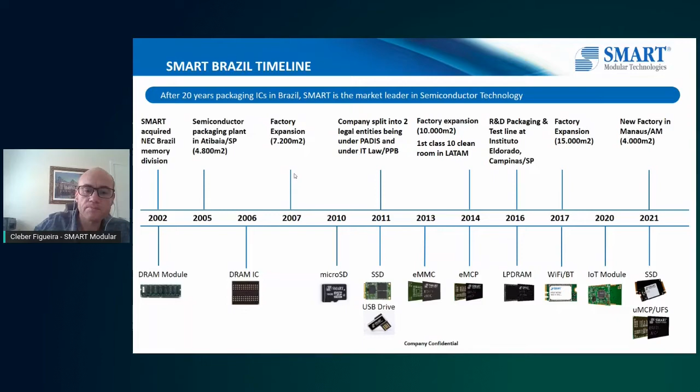So here, just to give you an overview about the Smart Brazil factories: we have the semiconductor company located in Atibaia, with capacity around 150 million dies per year. This is our actual capacity that we can assemble. We have around 15,000 square meters, and of this 15,000, 5,000 is a clean room. Our major activity is packaging devices, integrated circuits in several areas that have DRAM, Flash IC, SSDs, and others.

For our memory companies, we have two structures, one in Atibaia and another in Manaus, and also an R&D center inside the Eldorado Institution in Campinas. Our internal production capability - all the machines we have - uses M2M communication, all based on Industry 4.0. We also have a full automation system, with more than 316 robots in the structure that help make our production easier, and a specific MES system that helps our production team and engineering team manage all necessary activities in our production line.

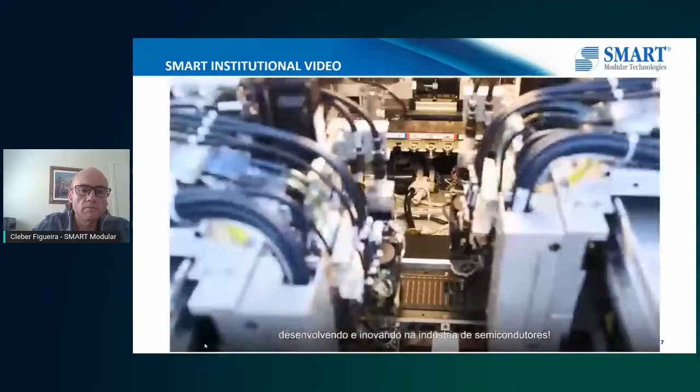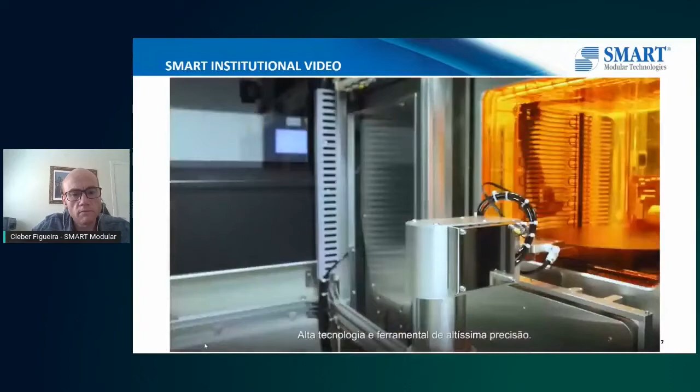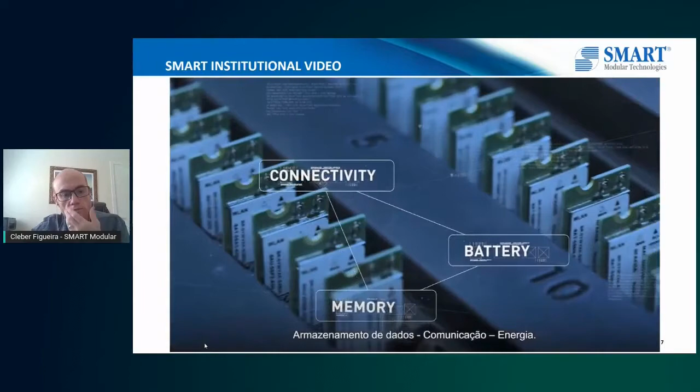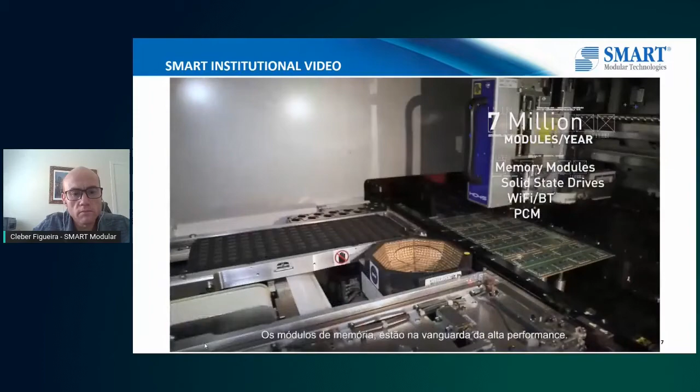Each new day, technology is more and more present in people's lives. Everyone is more and more connected. Technology does not stop evolving, advancing. SMART Modular Technologies is at the very heart of all this evolution, developing and innovating in the semiconductor industry. With a large and modern production center, advanced equipment, high-tech, high-precision tooling, machine-to-machine communication, robots, training and advanced manufacturing, prepared for the fourth industrial revolution - Industry 4.0. SMART delivers products that form a tripod: processing and storage, communication, energy. More than 15 years producing semiconductor components for the world's largest manufacturers and dominating chip packaging technology in Brazil. Memory modules at the forefront of high performance. Lithium-ion polymer batteries provide power to the most renowned devices in the mobile communications market.

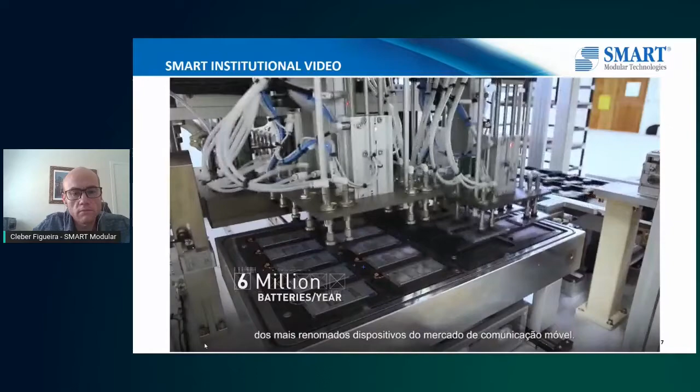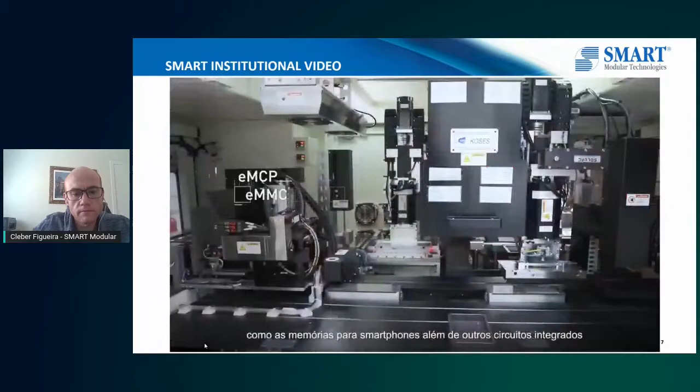Approximately 670 million reais were invested in the development, design, and implementation of semiconductor components, such as memories for smartphones and other high-tech memory integrated circuits. An additional investment that can reach 700 million reais by 2021 is already planned.

SMART is a global company and is proud to have chosen Brazil to be its technology center for semiconductor components packaging, strategically located in the city of Atibaia, state of São Paulo. SMART also has a research and development center dedicated to its operations in Campinas, producing products with high standards and excellence.

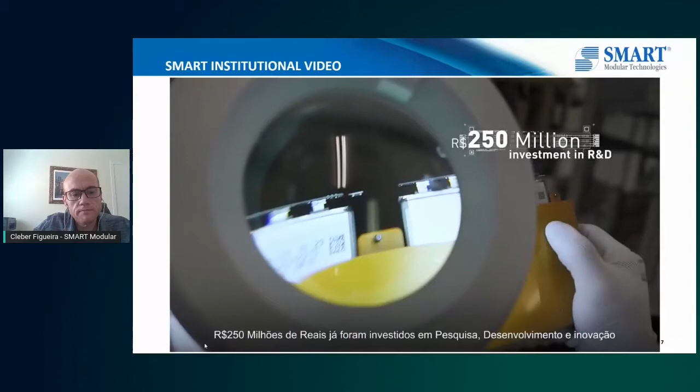250 million reais have already been invested in research, development, and innovation of products and manufacturing processes. An example of this is the unprecedented investment in the creation of a semiconductor prototyping line within the Eldorado Research Institute in Campinas, state of São Paulo.

The worldwide technological evolution does not stop. The priorities for the Internet of Things are already defined in Brazil. SMART is part of the National Internet of Things plan, developing innovations to keep at the forefront of all this evolution.

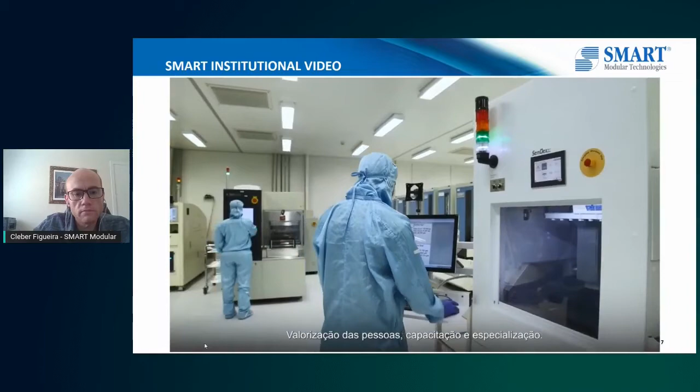People recognition, training, and specialization. Professionals with the highest levels of academic background. The challenge of further driving and developing semiconductor technology is the challenge of creating the future. SMART works unceasingly to be at the front line of this future.

Think memory. Think SMART. SMART Modular Technologies, developing technology and projecting the future in Brazil.

So this is the video that I'd like to share with you. This is important to give you a better understanding of what kind of capability we have inside of SMART and what we can do in our production.

So moving ahead with our presentation. Here I'm showing the main activities that we have considering the R&D team that we have in Brazil and Korea. As I already said, we have a very close relationship with a development team in Korea. We have more than 30 engineers located in Korea to support our activities in Brazil.

Basically, we are focused on developing new business, looking for the market necessity, designing new products. We also have a very close relationship with some universities in Korea, where we can send our engineers to join some trainings, to learn new technologies and new products, and once they are prepared, they come back to Brazil and help us develop the products that are important for us.

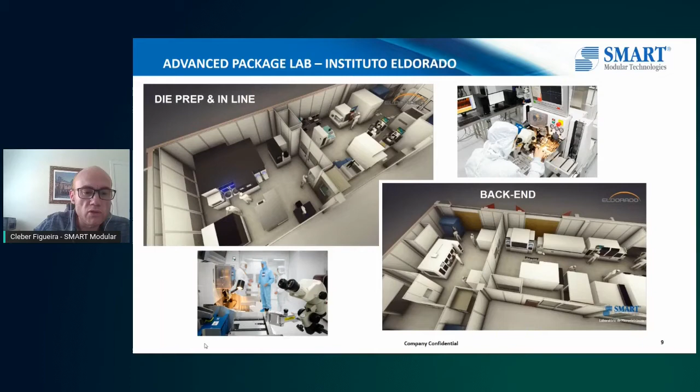Talking about some of the technical capabilities that we have, nowadays we are able to develop some products designed in Brazil. Some system in package - we just concluded one product that we developed recently. It's a system in package based on LoRaWAN technology. I will talk a little bit more about this development later on in this presentation.

Also, we are able to develop some integrated circuit packaging processes. We are able to develop a new process assembly inside of Eldorado. So we can also validate some multi-chip packages once we are talking about the new technology. We are able to do some memory module designs in Brazil. We can support this kind of activity.

And also, we are able - now we are working on IoT product design. We already developed some modules, some evaluation boards, and some application boards that are supporting the market necessity and some customers that we have nowadays inside of Brazil.

Also, we are able to test and validate some new technology. At this moment, we are studying and evaluating two new technologies that we imagine are very important for us, looking toward 5G technology. One of them is the laser trench. The laser trench is a process that we need.

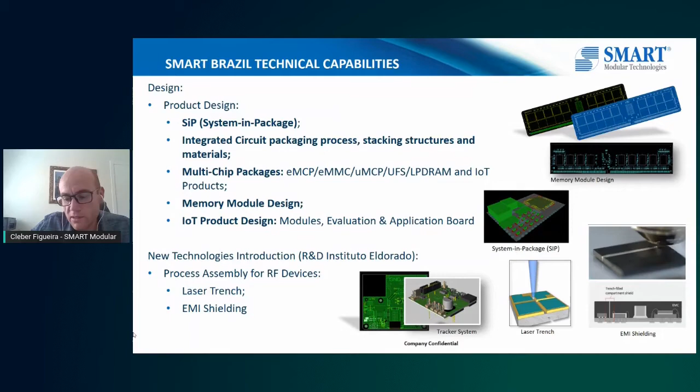Once we are talking about the technical manufacturing process, we are able to do several activities. We are able to prepare wafers up to 30 micrometer thickness, very thin wafers that we use in our encapsulation and package process. We also have stealth dicing before grinding, a new technology to prepare wafers for the inline process.

We already developed some products that are able to have die attach up to 16 die stack. So we have a picture here, let me use the laser pointer. This is a product that we developed inside of Eldorado, where we have 16 die stacks, and we transferred this technology to our manufacturing process.

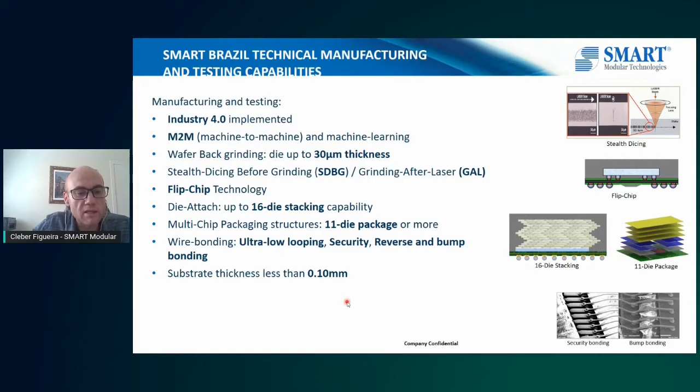The most complex device that we have nowadays has 11 die stacking inside of the same package, and the thickness of this package is around 1 millimeter. So you can imagine how complex and what kind of challenge we have to assemble this product in our production line. Also, to give one idea, the substrate thickness we use nowadays in our product is less than 0.1 millimeters.

We have a very, very close relationship with Samsung. Samsung is our strategic technological partnership. They are responsible to support us with the wafer level, so all the wafers that we use in our production came from Samsung, from Korea.

We just implemented this, and our first sustainable report was launched last month. We can find this report on the internet. We can find this report from SMART, where SMART Brazil is located inside of the SMART Global Holdings report.

Also, I'd like to call your attention to the AEO certification that we already have. And as SMART is NASDAQ listed, we need to follow SOX compliance, and we undergo annual compliance audits to be in accordance with the governance, regulation, and compliance necessary for NASDAQ regulation.

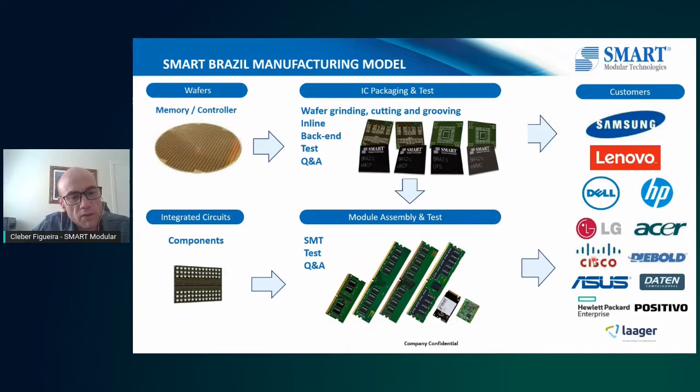Our main customers are Samsung, Lenovo, Dell, HP, and others. Part of the IC that we assemble becomes our IC package. Part of them is transferred to our module assembly line inside the other company. So the IC package is our raw material to assemble the modules and other devices, especially memory modules and SSD. Once we conclude the assembly process, these products are provided to customers the same as the IC package.

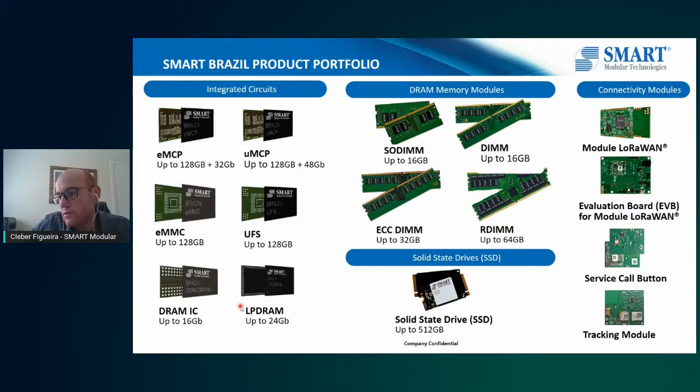So let's start to talk about the IoT development activities that we are doing inside of SMART Brazil nowadays. We started the activities for IoT around 3 or 4 years ago. At that first moment, we decided to take a look at the IoT wireless connectivity technology that we have on the market. So we started a study about the value chain and tried to see what the main technologies are for this kind of product in Brazil.

Based on several research studies that we did with some partners and potential customers, we identified that the most relevant and important activities to focus on are long range technology and especially low power. So then we started to study what kind of technology we have inside of this group, and we identified LoRaWAN technology, Sigfox, and also LTE, CAT-M, and CAT narrowband activities.

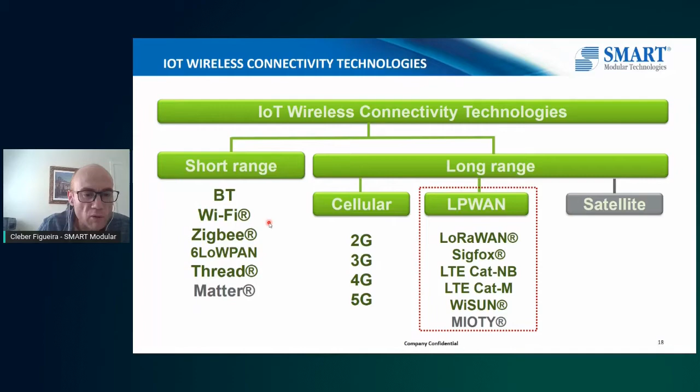Once we had this definition, we prepared our strategic plan inside of SMART to start our internal development. As the second part, once we identified the technology, we started to study the market necessity, and we identified what the potential device could be, considering the technology we imagined would be interesting to support our internal activities.

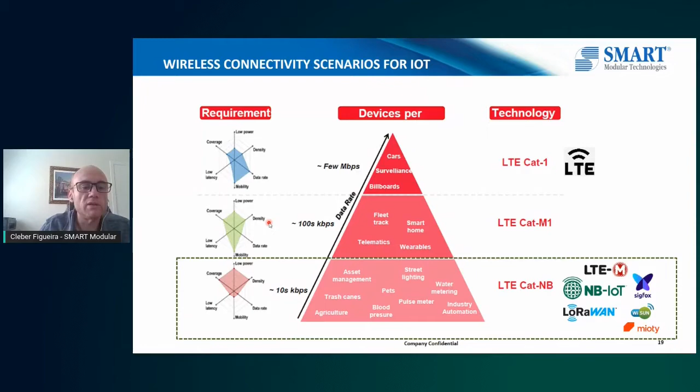So then we decided to work especially on the base. We started to work using devices to support especially asset management, street lighting, and water metering. So then we started to work internally to develop products to support this internal necessity.

Here are the main application segments we defined inside our strategic plan. At this moment, we are putting focus especially on the metering segment and also on the tracking segment. All the products we are developing now, and also the products we already developed, are to support the activities in these segments.

So we are putting focus on power, water, and gas, and also on asset tracking. Based on these definitions, we started to develop our products in the Brazilian team. So the first product we launched is the LoRa Primo, this device. It was launched in May 2020.

In sequence, we started to work on other different products with the same footprint and the same technology. What is the advantage? Why did we define the same footprint? This is one advantage, especially for the final customers, because once they develop a product using our module, it's possible to change the technology very quickly without needing to change anything in their design. So the main idea is to give flexibility for the customer to use different technology in the same PCB design or product design.

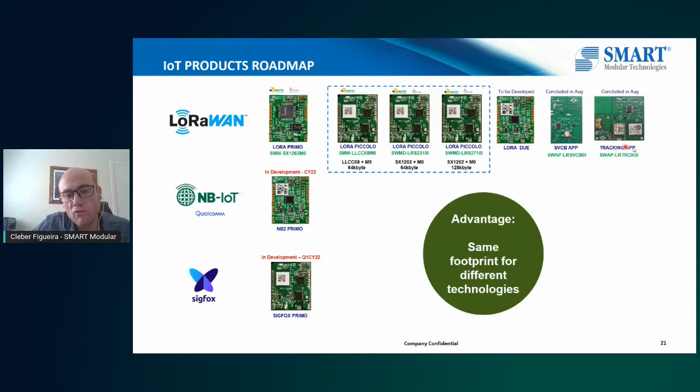So this is our first module, which we launched in May 2020. We already have around 60,000 devices in the market under usage in different applications, and up to now we haven't received any return from the field.

One important thing about our module: 100% of the devices we manufacture in our company in Atibaia are 100% tested in the production line. So we have high confidence that the product has the right quality to support activities in the market.

Additionally, it's important to say our module is able to work with up to 20 dBm RF power transmission, and we have 6 GPIO communication on this device.

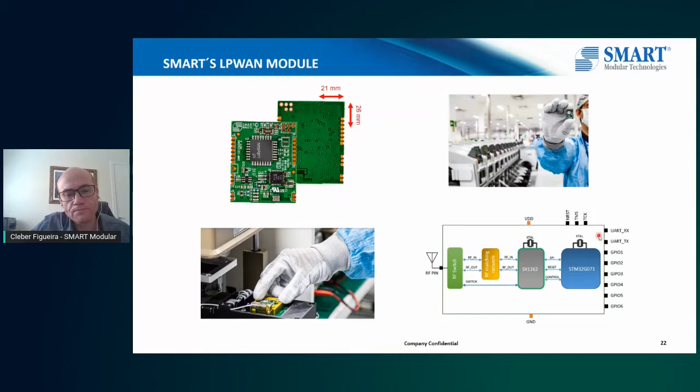To support our customers' activities, we decided to develop an evaluation board. This is a board we can provide to anybody who wants to test and validate our product. If you want this board, just get in contact with our new business development, and I can give you the details later. You can request this board to test, validate, and see how our product is working nowadays.

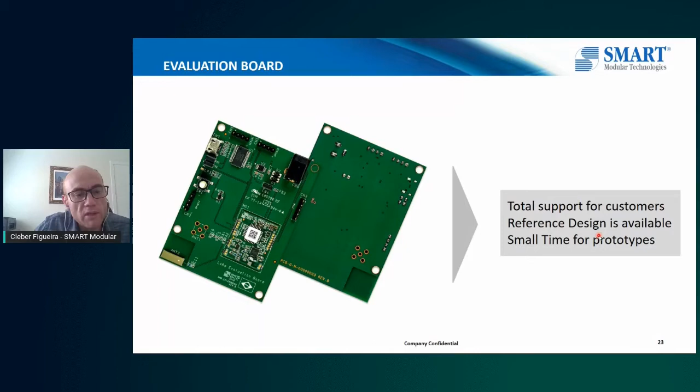We also have a very good technical team inside SMART that can give you total support to develop your product. We can also provide some reference designs that we have available. The main idea here is to reduce the time needed to prepare your prototypes.

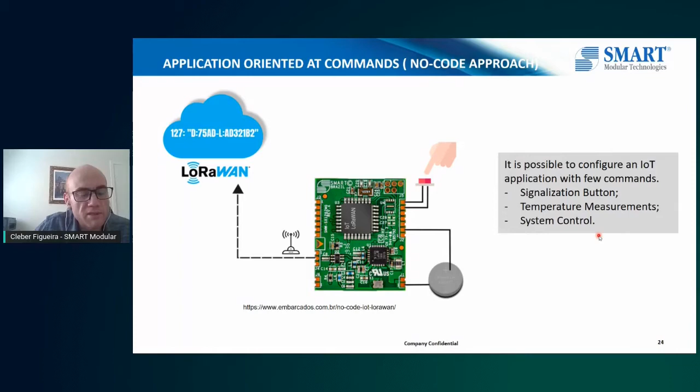This is another item we are working on with our local team: we implemented application-oriented AT commands. What does that mean? We developed commands inside our firmware, placed inside the device, that give you the possibility to implement small applications very quickly, so you don't need to develop the firmware from the beginning. You can provide AT commands to the device and configure it to work as you want. For example, we have firmware already prepared for a signalization button, temperature measurement, and also system control.

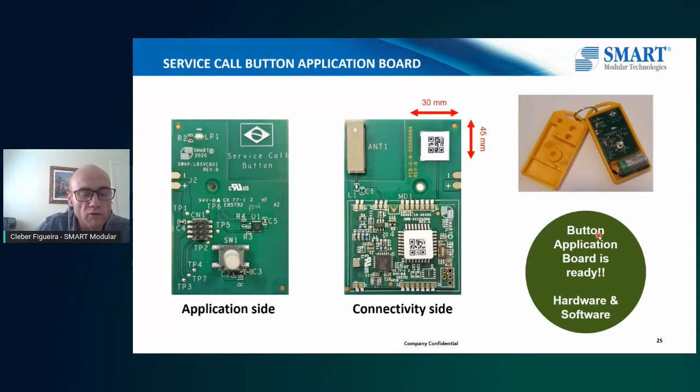Here's just one overview of one of the application boards we have. It's a very small device, like an emergency call button, with an accelerometer inside. If you fall, it can send a message to the servers, or you can configure a mobile device to receive the message. So it can give you support and call your attention based on the emergency situation. This board is already developed, and we are able to support it with prototypes and samples, to validate and see how the device is working.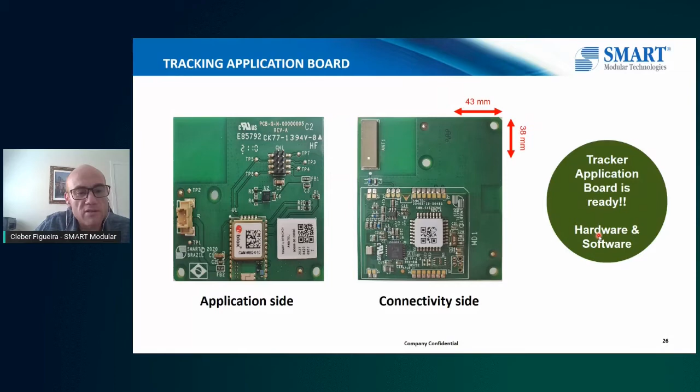So here also is a track device. We developed this one very small, so we can put this device inside a cigarette package. It is smaller than a cigarette package, so we can use this device in different applications. We can use it as a tracker, as an emergency device, or to monitor items like children, and other applications as well.

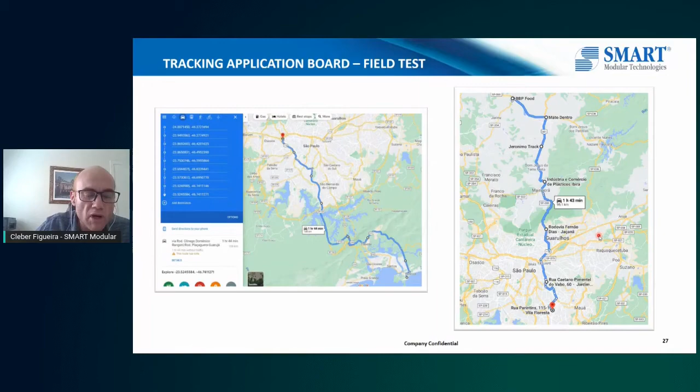So I'm going toward the end of the presentation, but I'd like to give you some idea about the new product that SMART is working on. It's a local development that we are doing in Brazil. Our team started to work on a system-in-package design, 100% of the device made by the team in Brazil. The idea is to reduce and put all the functionality from a LoRa device into one integrated circuit.

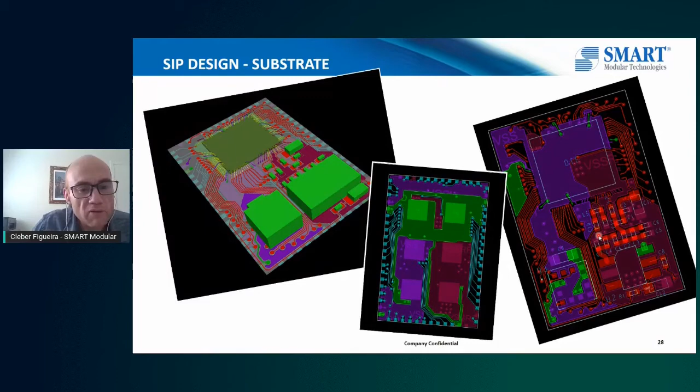As the next steps, we are starting to do some internal qualification. We are trying to use the device in different applications to see its behavior once we start working with it. Additionally, we are working to develop some evaluation boards. The main idea we have in mind is to provide this device for tests using some customers that we have in our portfolio.

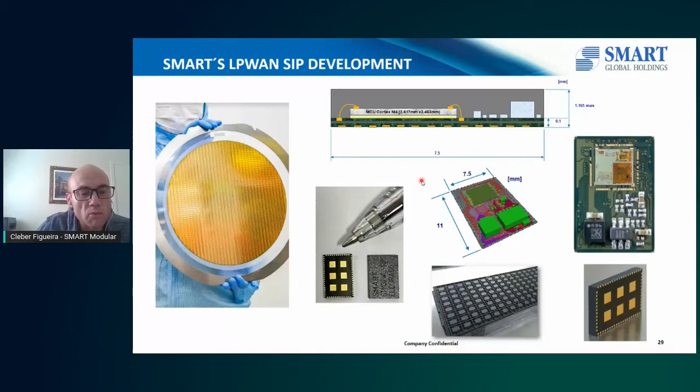Thank you very much for the opportunity. This is all I have. I hope I covered all the expectations during this presentation.

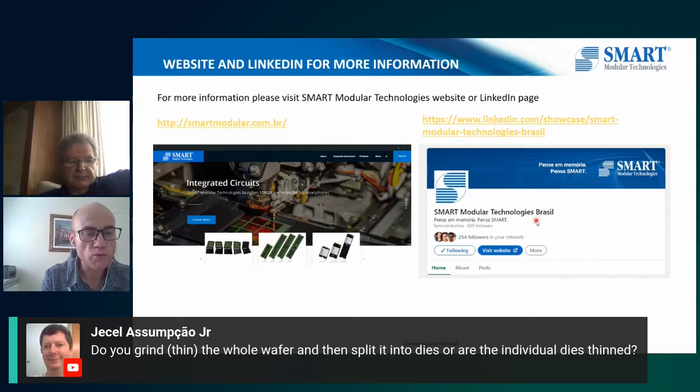And we use the grinding process to reduce the wafer thickness. Then we can make the second step, depending on the technology. If we are talking about back grind, the SDBG process is a little different. But if we are talking about grinding with laser groove and die sawing, we need to reduce the thickness for the whole wafer before we cut it to have the device for the die attach process.

So one trend is to put all the electronics in just one chip. How do you see this evolution of this trend?

Yes, this is the project from the last item I presented, the system in package. The main idea is to put all the devices in the same structure to support the activities. From my point of view, this is the tendency for the future, to reduce the number of devices that we have in the market. However, we have a lot of challenges in this process.

We need to take care about the timing, the communication timing between the devices, because the package is very small. How can we put all of them in the same package when they will be very close to each other? Then we start to have other problems like crosstalking, and electromagnetic interference between one and the others. So we have a lot to work on in this process, Professor.